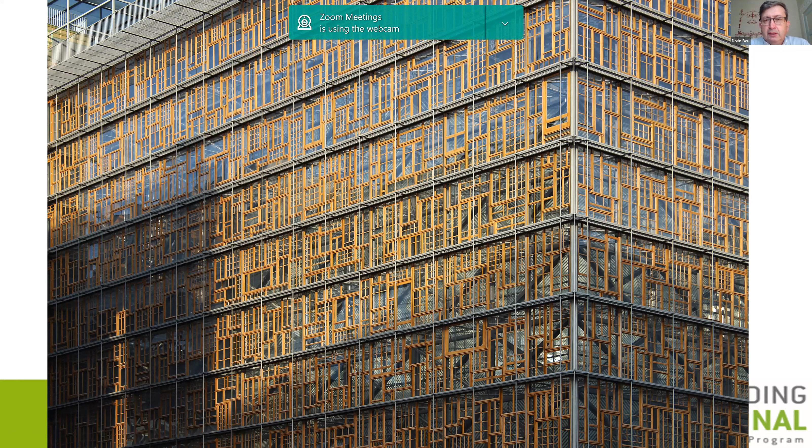So then, selection of a design team. Always try to find a design team with experience, local architects, local people, especially young teams who are interested in green or sustainability or other aspects like that. Because at the end you will need a very large professional team, and this team will tell you how well your future building will perform from the point of view of sustainability - will you have LEED Platinum, LEED Gold, BREEAM Excellent, or other systems for assessing a building?

Think about site design, ecological integrity, and avoid disturbance to water systems. That's very important. Also think about landscape, because in a school you'll need green spaces, but not a lawn. A lawn is not typical for this area—it's okay in England where it rains twice a day, but in our part of the world you need a lot of water to keep it green. So use local plants which survive well in your place, not exotic plants that won't last during winters.

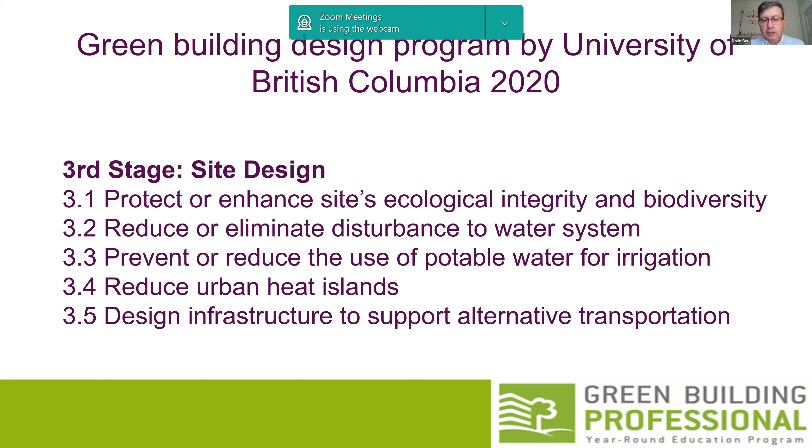Then think about alternative transport—bicycle, scooter, or for a green building, it's important to have public transport nearby. If you have a school, you need public transport so people can go by bus. That's one of the differences between a very energy efficient building and a green one. A green building also needs to think about transport, because it can be very energy efficient but in the middle of nowhere, so people spend a lot of time and fuel getting there.

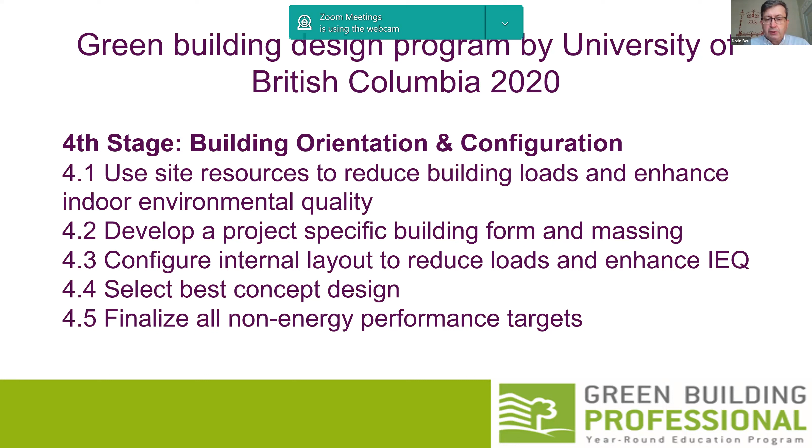Building orientation and configuration—at this point you start thinking about the architecture of the building, how it will enhance the use of solar passive design and things like that. That's very important, because you want to use as little energy as possible.

This is the typical stage for any building to think about energy, structure, envelope, lighting—it's appearing for the first time. Then the last part: reduce internal loads. Think about indoor air free of pollution. There's a tendency to use a lot of laminate furniture, but this comes with a problem—a lot of formaldehyde, which creates VOC problems. VOC is volatile organic compounds.

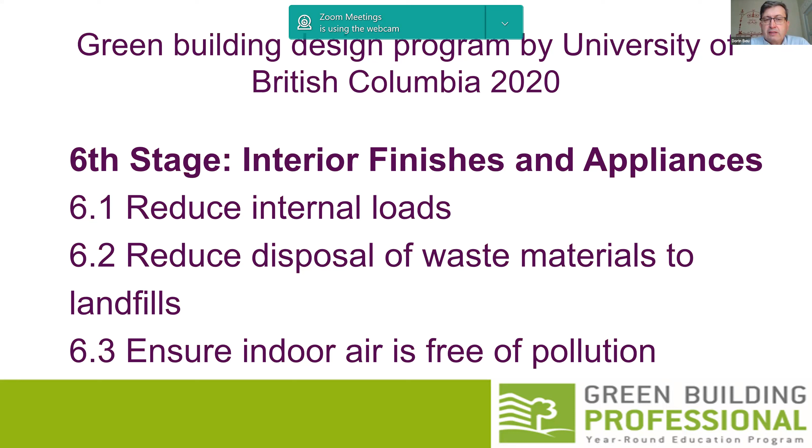Also think about all the waste materials that will be produced by any building. According to the EU, 19% of materials used for construction becomes waste. No one can afford so much waste, so think about it. As a conclusion: use less stuff.

Whenever you're thinking about a building, first ask: do you really need that building? Does it need to be so big? There's usually a tendency for any mayor to have big buildings, big offices for city council, big schools and so on, but does it need to be so big? So build less—that's one of the first steps—and then build clever, using clever solutions, and build efficiently.

Prefabricated solutions are usually an efficient way of building and also minimize waste. That's very important. And then, of course, specify low carbon. But first thing first, think about using less stuff.

That was just a beginning, because I used to be for 4 years the president of the Romania Green Building Council, after Steve Borncamp, an American who introduced RoGBC in Romania. That was an important step because it made us think differently, since the classical way of doing things, especially in the Romanian construction sector, was that only the price mattered—the rest had no importance.

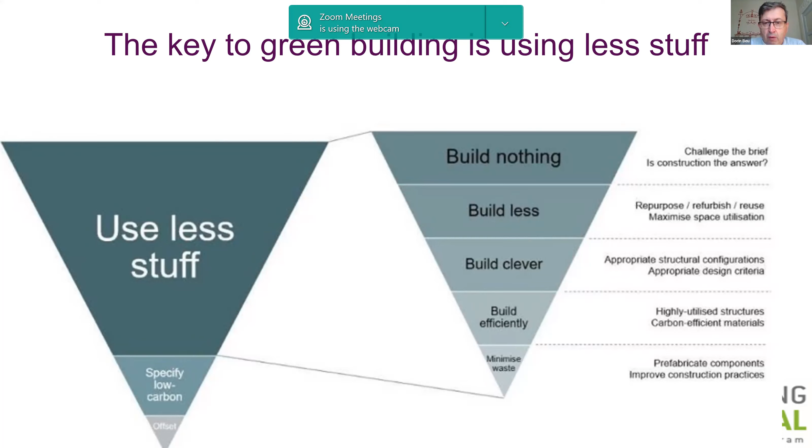But first I'll start with a plea for lighting. Why a plea for lighting? Because I want to start with the idea of why lighting is so important. Let's start with the advertising—everybody thinks that LED is the solution for everything in lighting.

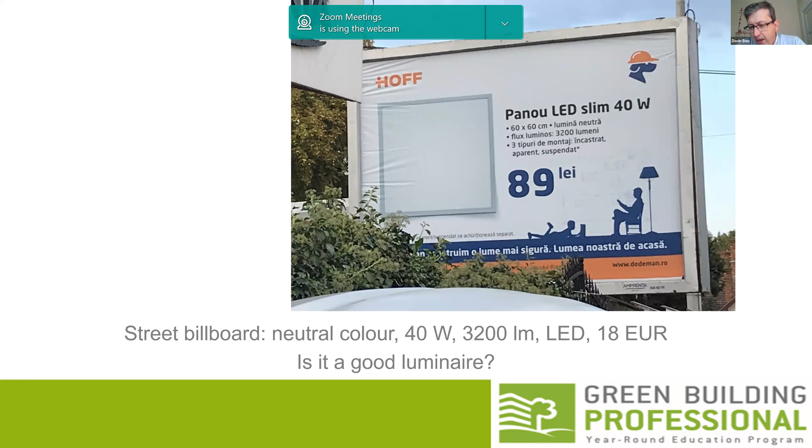So we got a lot of advertising saying it's a very good luminaire, very cheap. It costs the equivalent of 18 euros. It's not so expensive, but is it a good luminaire? Because every time someone comes with an LED solution, you need to think, okay, is it a good one? Because there are good LEDs and there are bad LEDs, and that's a problem.

First of all, lighting with LED has a problem in color rendering. Not everywhere is that a real problem. For instance, LEDs are not very good with red. If you have something red, LEDs are not the best solution. This is important for an art gallery or hospitals, but in a school I don't think it's so important. It's important when you're doing your makeup as a lady, but yeah.

Another issue is efficacy: from 1 watt of energy, how much light will you get? For instance, for this luminaire, you get 80 lumens per watt. But the newest generation of LEDs can have double the efficacy. So what will be your solution? Buying a cheap one which is not so efficient, or spending more money for the best efficiency, but probably it will also cost twice as much. It's usually a difficult question.

Also, no mention about power factor for electricians—that's an issue. What about life expectancy? Everybody thinks an LED has a very long life, something like 100,000 hours, but not all LEDs have this life expectancy. For instance, in a house you're using it for 1,000 hours, that means for 100 years that LED can function. Well, in fact, they don't last so long. Now we sometimes find that when you buy an LED lamp, it lasts only 1 or 2 years.

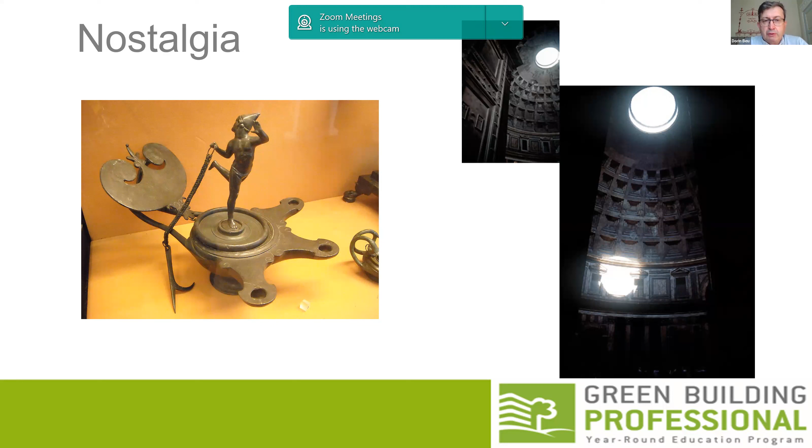As I used to work with a lot of architects, when I enter an architect's office, I'm always looking at the lighting, because lighting has got to do a lot with status—how much money you have, what's your taste. That was always the case, including during Roman times: if you were rich, you used a bronze candle, but for others there were oil lamps which were extremely cheap. That was the big advantage of the Roman Empire, which brought about the first democratization of artificial light.

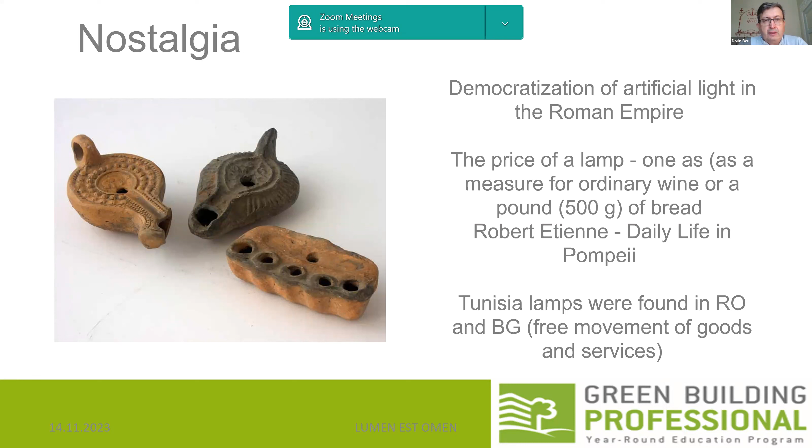This kind of lamp runs only on olive oil. So if you find this kind of lamp in the former Greek colonies in Ukraine, that means they also had olive oil coming from Greece, which was extremely important. Sometimes they were produced in other countries like Tunisia, and you can find them elsewhere as a sort of import material.

Also, there's always a nostalgia when it comes to the lamps used in a city. Sometimes cities use old shapes of luminaires because there's a lot of nostalgia.

There are some cities in Romania using the same type of luminaire that was used 100 years ago in the Austro-Hungarian Empire. It's a sort of nostalgia, using this kind of luminaires. But sometimes you go for extreme anticipation, and that's also the beauty of lighting, because sometimes you have a lot of design involved in luminaires.

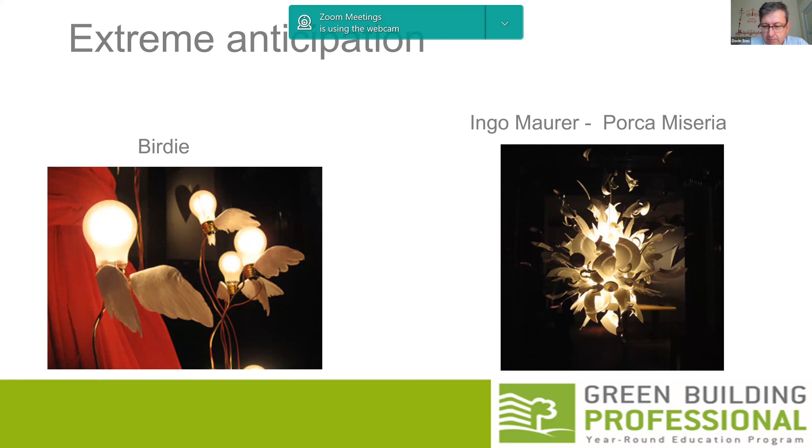Because you can have very nice luminaires, sometimes with very cheap materials, like this Ingo Maurer, which was using extremely, how to say, arte povera, which means art made from very cheap materials, like from broken glasses or plates. He made an extraordinary chandelier.

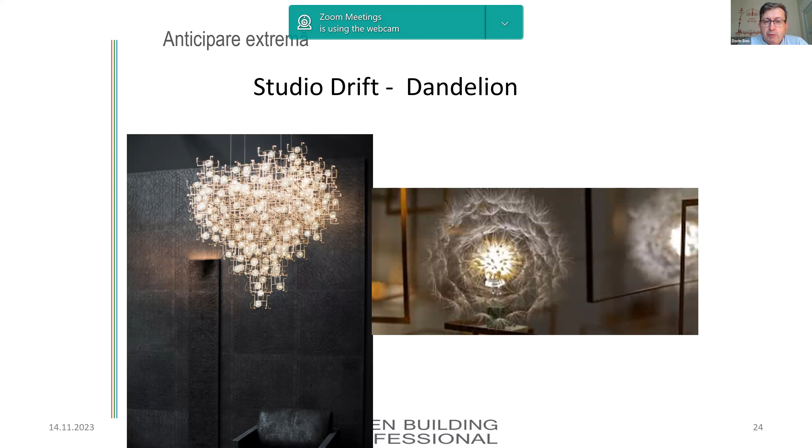But sometimes it can be also innovative, because they are using new solutions which were not possible with former solutions. For instance, this is a chandelier made with LEDs, and on these LEDs they have glued dandelion seeds. That was not possible before because the temperature of an incandescent lamp is 300 degrees. If you're gluing something, it's setting fire instantly - well, not instantly, after 1 minute it will be set on fire. Now you can do this with LEDs.

Or sometimes architectural lighting is a little bit too much. For instance, in the 2000s, it was something normal to have color lights. Now I'm more skeptical about color lights, which was a technical prowess 20 years ago, but not anymore. You can have color light, but you have to keep in mind what's the purpose of this, because sometimes people are using it inside their home, and there's a lot of advertising - you can have color changing lamps.

But what for? Because natural light is white light. You don't have blue light or red light - rare, except when you have aurora borealis. But this is okay for 1 minute, not for the whole night. I tell you, you won't like to have it in your living room and see your kids with green faces. That's not something very pleasant.

Sometimes architectural lighting doesn't need to be expensive, because one of my problems is that sometimes green buildings are supported by a lot of companies trying to sell very expensive state-of-the-art products, and it doesn't have to be expensive. Sometimes you need to be innovative or creative.

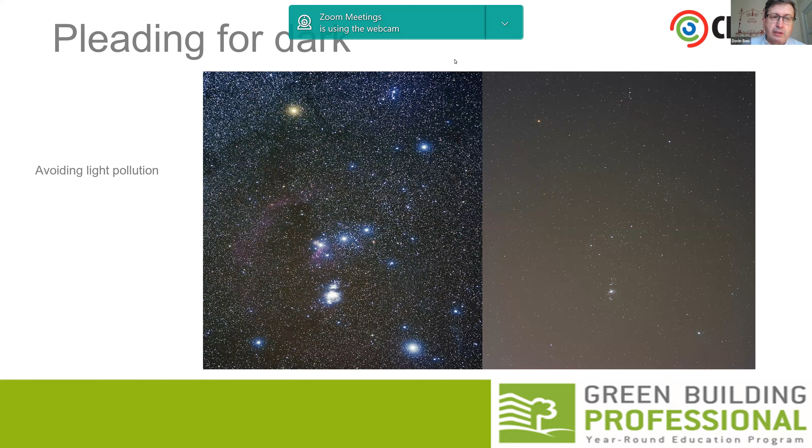That's why now we are talking about avoiding light pollution and the importance of seeing the sky, because sometimes we see this light pollution even from satellite.

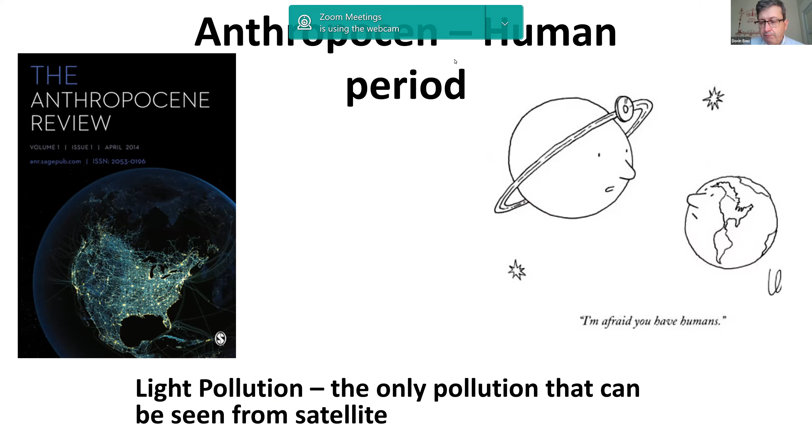But that's the basic idea of green lighting, because we have suffered a historical change - 100 years ago human rhythm was based on natural light, so most people were working in rural areas, working a lot on the land, and whenever it got dark, they came home.

And they were going to sleep. So a lot of work outside, sometimes even siesta, which is now found to be very healthy. And all the energy and materials they used for housing were renewable.

What we are talking about now already existed 100 or 150 years ago, depending on West or East Europe. But now we have this theory about the city that never sleeps and the 24-hour rhythm. For people from that era, it wasn't conceivable to stay in a room doing nothing - like just staying in front of a screen, listening to someone talking - that was inconceivable 100 years ago.

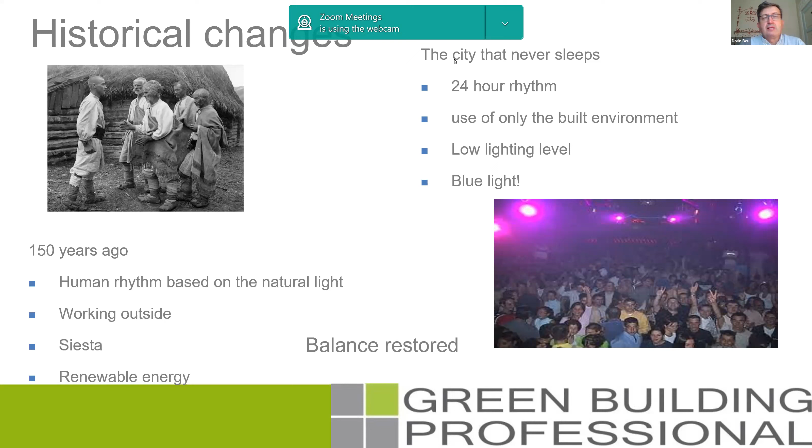So the problem is we need to restore the balance. It's the essence of green building - to restore this balance that has changed or shifted in the last 100 years.

And then in 2000, we found that blue light affects us strongly because we are very sensitive to it - it stops the secretion of melatonin. And what is melatonin? It's a hormone that we normally secrete during the night.

So in the evening, you go home, it's already dark outside, and you put yourself in a chair to watch TV, and then you feel sleepy. Why do you feel sleepy? Because you start secreting this melatonin, a hormone which gives you this feeling of sleep, and that's why you sleep during night.

Because think about a simple idea: why are you sleeping during night?

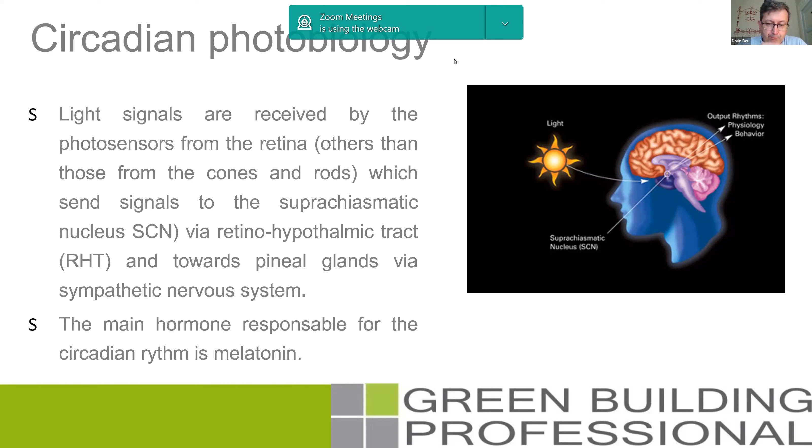So that gives a problem now, because now we have circadian photobiology, which is the way our body has an internal clock, and that internal clock tells the body it's morning, it's night, connected to the natural light.

So you can't avoid staying outside, or not being connected to daylight. This is one of the problems of speleologists, people who go into caves. You cannot stay in a cave more than 3 days. Why? Because your circadian rhythm is stressed, and after 3 days you have problems. You don't know if it's morning or night. Your whole body is messed up, and you start feeling unwell, with psychological issues too. So lately they do not allow more than 3 days in a cave, because it creates a lot of problems.

That's what I'm thinking about people who work in bunkers, army bunkers - from time to time they need to reset their clock, because it's so important to have this reconnection with nature.

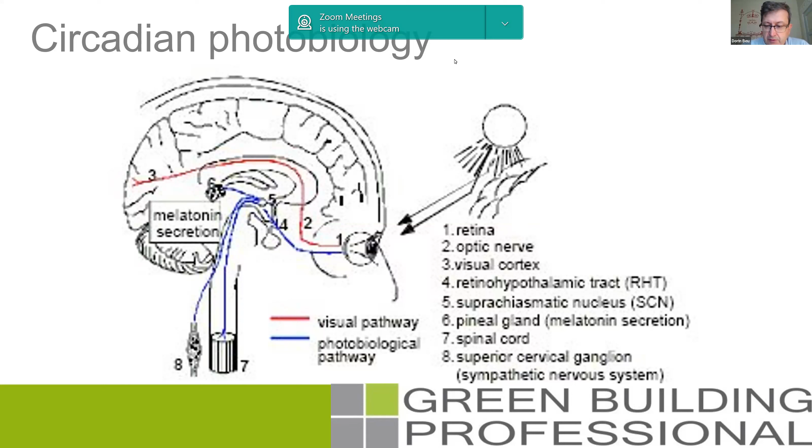So this is the circadian rhythm - try to use as much time as you can outside, because we are used to working a lot inside buildings, and this is not natural for humans.

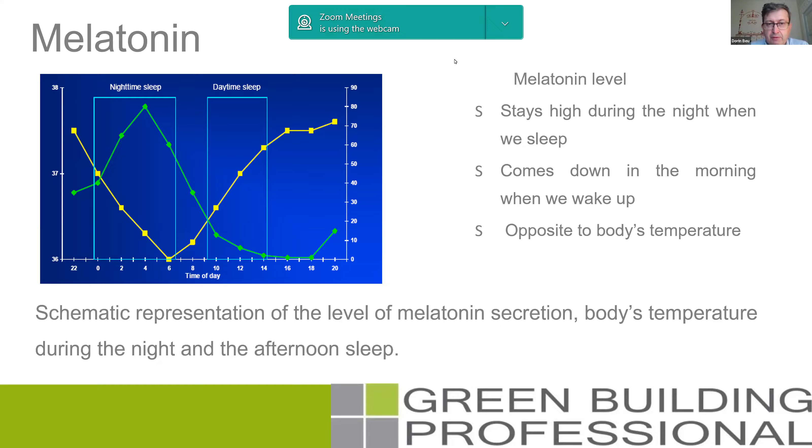So it doesn't mean you need to light it up for the whole day, it's simply that you need to do something with that building. Sometimes with architectural lighting, it's like makeup - you don't need to use a lot, just use it where it's really necessary.

This is also important - there's a lot of importance about green lighting and green buildings. On the sustainable side, it's important to show that you're not creating light pollution, so the light from your building doesn't go to your neighbor. This is extremely important - avoid light pollution, especially to your neighbors. You don't need to put a lot of light, especially light pointing upwards - a lot of recessed luminaires give light upwards, and that's a waste of light.

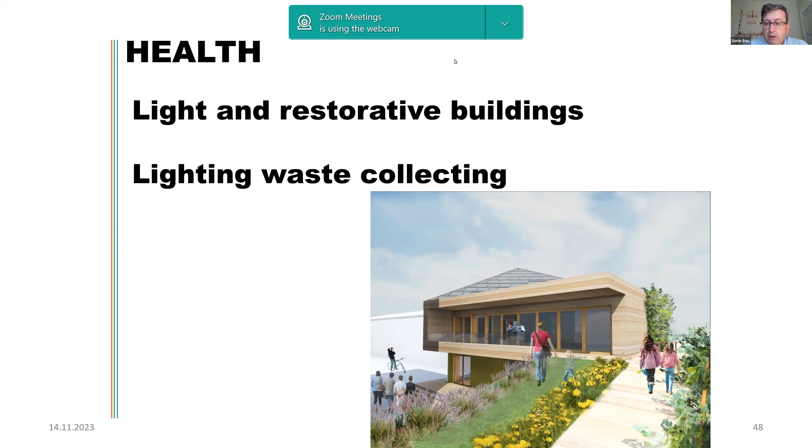Also, you can sometimes have plants inside the building, but it's not the best solution, it's one of the possible solutions. It changed everything with the LEDs. Why? Plants don't need white light, they need a combination of blue light and red light. So that's also a problem now for police, because now you can grow cannabis and these kinds of plants too easily with the energy efficient solution. I'm not pleading for this solution, sorry, but sometimes new discoveries create new problems, including for police. For small plants that's okay, you can grow it inside, but for the moment it costs too much money, and I will not encourage using this solution.

Also think that there are people who are not very happy with artificial light at night. We had a conference in Romania, and again, it's a question of balance: how much light are you going to use inside the city, where it's important and where it's not. Architectural lighting is important in some cases, if you have tourists, also during the evening, but not after 10 or 12 o'clock, because it creates only light pollution.

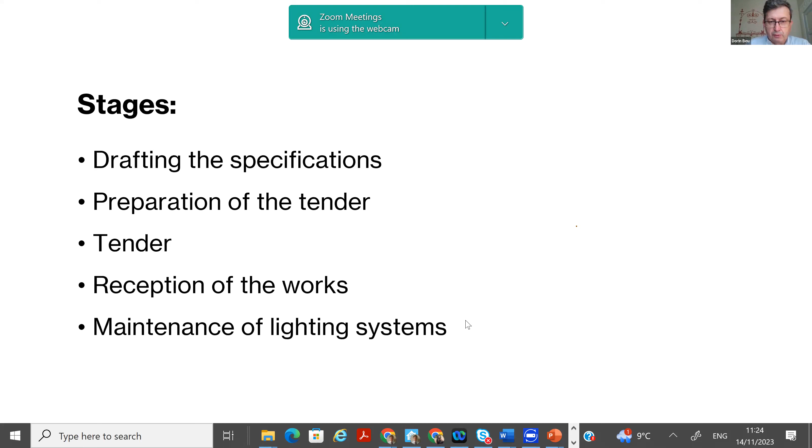Next, talking about safety criteria, we have emergency lighting for marking exits. Before it was written 'exit' in your language, which is not accepted now - the European Union says we don't have to argue about the language. There are many countries with two official languages, and there's always a discussion about which one to use. Now they say it's a simple pictogram of someone running, showing where to go, left or right, and this is very important.

There are several systems. One system uses a local battery. The problem is that in some cases they are cheap batteries, and after 2-3 years they don't work properly or don't last for 1 hour. For instance, in schools in Romania they should last for 3 hours, which is a lot of time - I don't know why 3 hours. I can understand in a hospital they need 3 hours, because there you have unconscious people and it takes a lot of time to evacuate everyone from the building. But for a school, 3 hours seems like a lot.

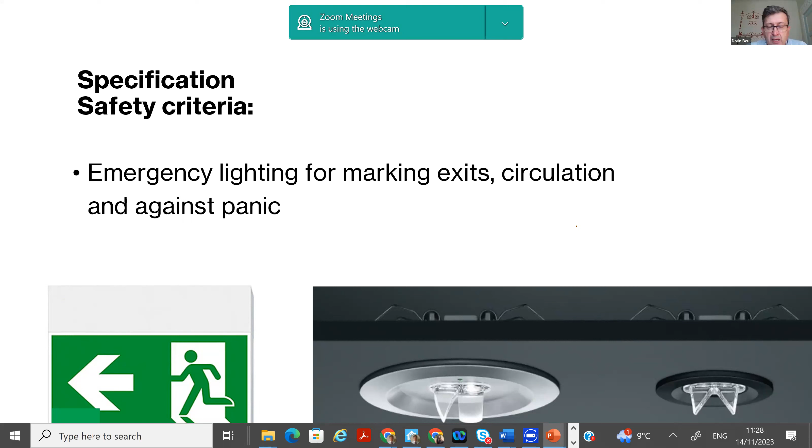So that's the first criteria, safety. Then there's a comfort criteria. You will ask me, where should I find these comfort criteria? It's in these standards, 12464. From this European standard, you can find the level required in a classroom: 500 lux.

It's required, modified - this is something new, appeared last year, this new standard saying that in the case of a classroom, you can ask for a higher level of illuminance. For what reason? A lot of students or people have glasses, and if you have glasses, you need more light, because a lot of light is absorbed by the lenses. Or in the case of old people like me, I need more light because I'm more than 50 and I need glasses.

Also important, I need uniformity of lighting. I don't want spots of light, this area more light, this area less light. If possible, I need uniform lighting, everywhere around 500 lux. But of course, you cannot keep 500 perfect everywhere. Some places you have 600 lux, some places even 300 lux with a 0.6 ratio. It's okay, but on average you need 500 lux. That doesn't mean you put the lux meter at every point and it reads 500, 500, 500 - on average it should be around 500 lux.

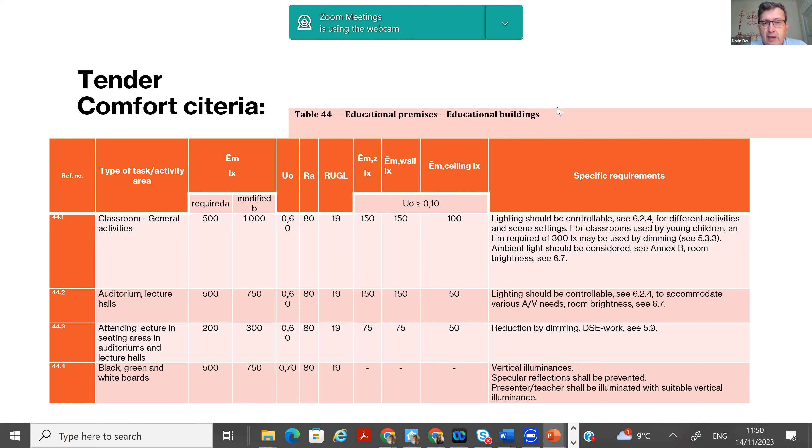Because of all these criteria I presented here, 500 lux, uniformity 0.6, I need to go more than the required value. Only with the glare do I need to be under 19. Let's go again. For floor, ceiling, and walls, it's not quite as it's asked, but usually I'm only asking for illuminance on my working plane, for uniformity, and for UGR, meaning glare, unified glare rating should be less than 19.

The problem is here I need 4 times less in order to ensure the illuminance is above 500 lux. So yes, you should ask the company doing the design to show that the target values are reached. You had some specification, they've done the calculation, and they can show that all your requirements are met, and that the power is only 226 watts, which means you need less than 4 times the value from before.

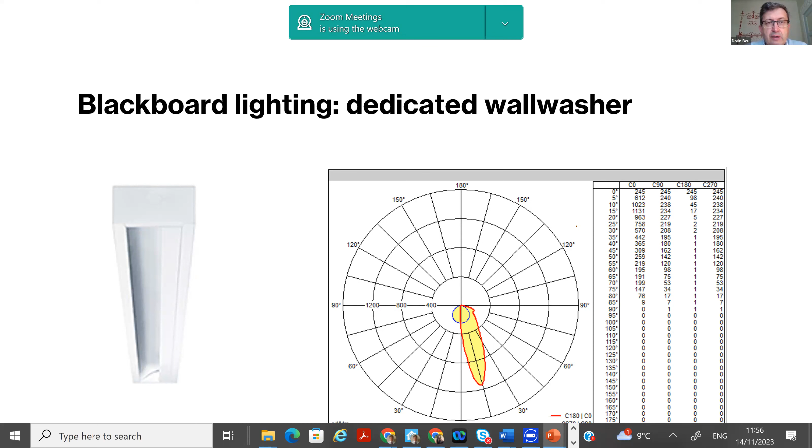That means it gives light only in one direction. The direction, of course, is the direction of the blackboard. Now it's blackboard, whiteboard, it can be green board, doesn't matter. You need light on that wall where the blackboard is. And usually you cannot have light there if you're not having a wall washer.

And then what I also recommend is to have an electricity meter exclusively on the interior lighting system, so you're measuring how many kilowatt hours were used by the interior lighting system. Why interior lighting? I'm not measuring how much energy is used for exterior lighting, that's another topic. But I need to measure what's used by the lighting system. So how do I measure? By kilowatt hour. Then I do a simple calculation, get out your smartphone, divide it by how many square meters you have in your school. That's how I can compare two schools.

Because if I'm comparing as an energy, but one school has double the surface of the other, it's comparing apples with pears, so it's not fair.

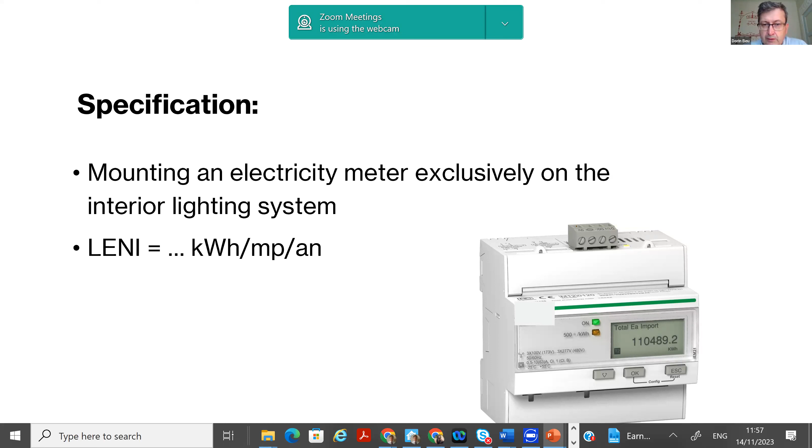Remember, this is important for measuring the performance of a building from the point of view of lighting. The same criteria apply to heating, ventilation, hot water. You need to measure how much energy you're using per square meter for one year's time.

And also for accepting lighting works. So you had the tender, somebody won the tender, they installed some luminaires, they will tell you they found very good and very cheap luminaires and whatever criteria they will have. But in order to accept this lighting work, you need to go with a lux meter. You don't need to go personally - if you're working for a city council, you may have a specialist, independent from the company who did the job, and he will go and measure the average illuminance on that space.

But it's important to measure it because, one question should be: if I need 500 lux and the installation is brand new, and I measure all over in 12 points, and the average illuminance is 550 lux, is it okay or not?

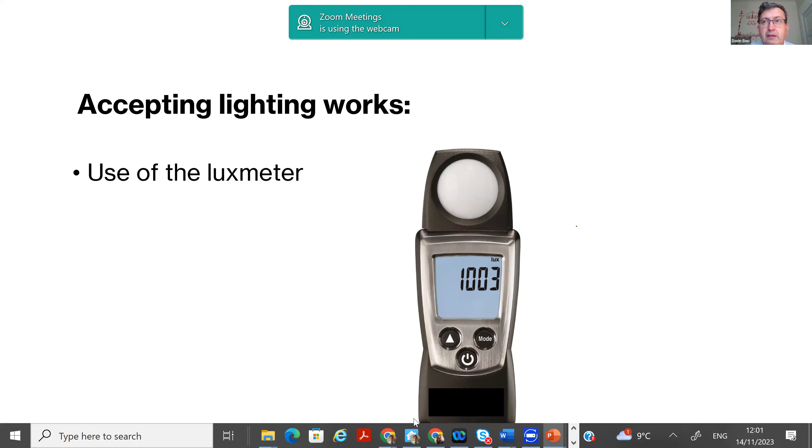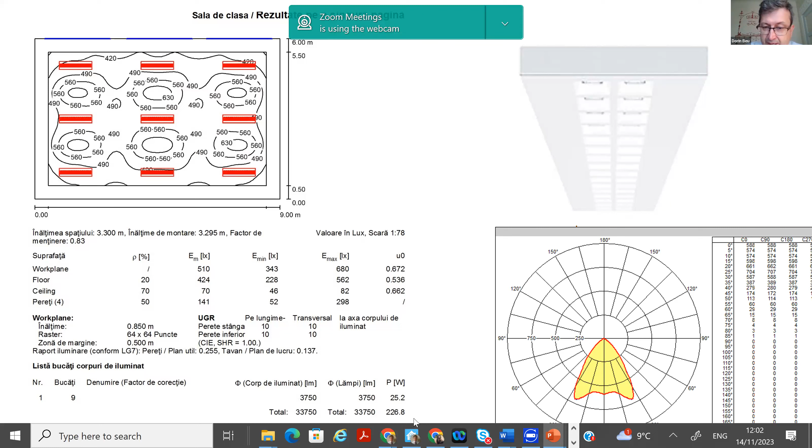0.80 means you're cleaning the luminaires every year. I don't know about Ukraine, but in Romania, definitely they are not cleaning the luminaire every year. So I cannot see people coming and dusting the luminaire every year, unfortunately. They should do that.

Also an important thing, sometimes really forgotten in many places, especially in East Europe, is maintenance of the lighting system. What does that maintenance mean? It's the replacement of faulty luminaires. So I have luminaires, but sometimes, even if they are LED luminaires, it doesn't mean they work properly. Sometimes it's a faulty one you need to replace - it happens. It can be LED, this doesn't mean it's fault proof.

Second thing is improving the control system. When they are installing the control system, they are making some assumptions about how the space is used, and they give you some scenarios. For instance, I'm writing something on the blackboard - this is a scenario where I need lighting on the blackboard. Another scenario could be I have a presentation with a video projector. In that case, I don't need light on the screen - definitely, I need it as dark as possible.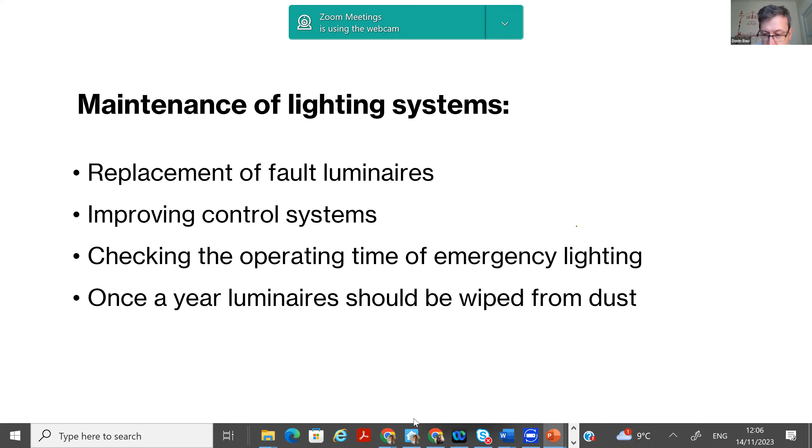And that's always the question: should we use a control system? Well, LED luminaires need a driver—the LED doesn't work directly connected to 230 volts, it's connected through a driver. It's an electronic device which supplies constant voltage or constant current to the LEDs. So these drivers, if they use DALI or DALI with the DALI 2 protocol—DALI doesn't mean the painter, it means a universal protocol—so in order to be sure that luminaires from different producers work well with my control system, I ask them to have DALI control.

And most of the luminaires, 99%, are DALI control, so they're using the same protocol. The only problem is that DALI on a driver just means it's a DALI driver, but DALI 2 is verified by an independent association—that's the difference. So I need that in order to control the luminous flux of the system—it has the possibility to control the luminous flux, or sometimes even the color temperature.

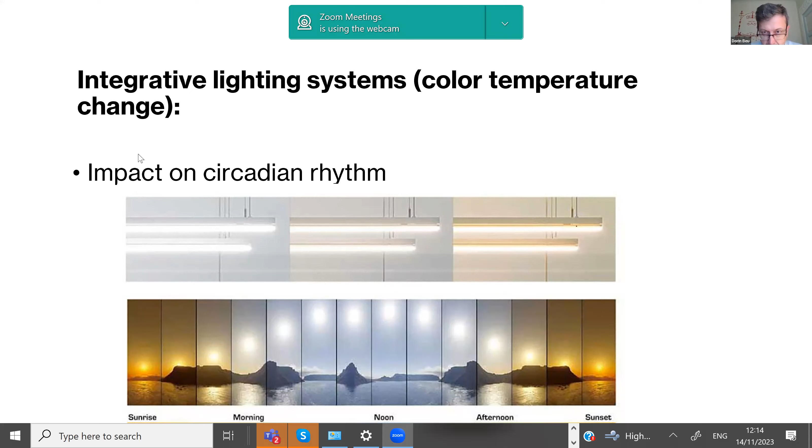There's one more presentation, about the future of lighting. My last presentation will be about the lighting future.

First of all, with all new technology there's the so-called Gartner slope. Whenever a new technology emerges, there's a peak of inflated expectation. That happened with LEDs more than ten years ago—everybody expected a sort of miracle from LED, that it would solve all the problems.

In fact, we then realized we created another issue: light pollution. LEDs have a peak in the blue area of light—most so-called white LEDs are actually blue LEDs which then have rare earths giving light across the whole spectrum, but they're still producing a lot of blue light, which enhances light pollution. That's always the case with technology: you solve one problem and create another.

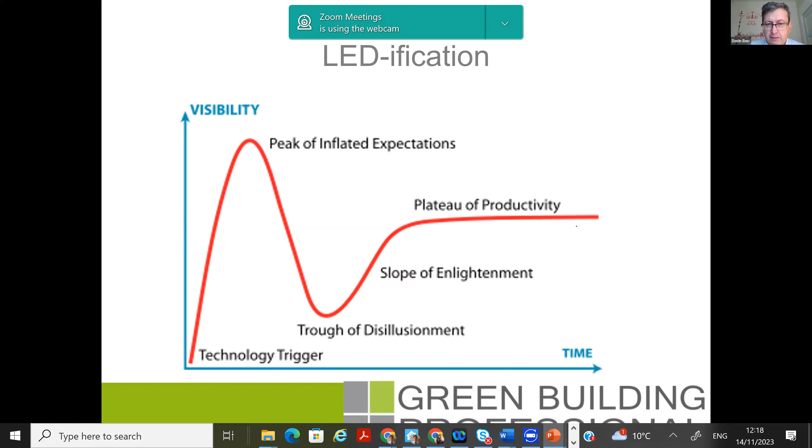Sometimes you must avoid buying the first product, but if everyone avoids buying the first products, the technology will be doomed. So let others buy the new technology, and always look for a product when it's on that plateau of productivity. It was the same with flat TV screens - at the beginning they were extremely expensive, now it's getting lower and lower with better quality and more gadgets. It's the same with LED.

Repeating a lot, there are several European norms. Work with these European norms. The first norm is about interior lighting. 1838 is about emergency lighting. 15193 is for performance. LED has no influence on the norms - it doesn't matter if you're using LEDs or not.

For the moment, we have no norm on human health. The problem about blue light - how much blue light should be inside the room, especially in the afternoon - we are still discussing this issue and haven't agreed. We agree, we disagree, but the second problem is about melatonin, and you know the problem now is with

children and youngsters and teenagers. Why? They are looking at computers and smartphones a lot during the night, and now they have a lot of issues with sleeping. I can hear it - my daughter is 24, but all the time complaining she's not having good sleep. All her friends have more or less the same problem, but it comes from the fact that they go to bed with their computer, their smartphone, and so on.

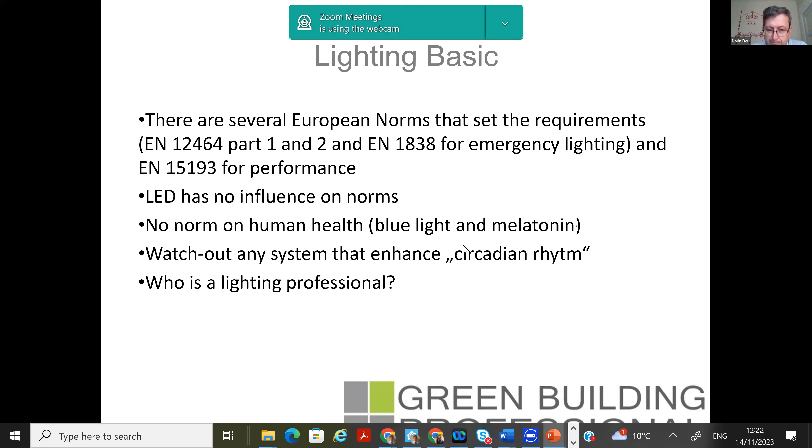Okay, so luminaire efficiency now is over 130 lumen per watt, and it's changing every year. I can put 150, I can put 180 - there are already LED lamps at 210 lumen per watt, coming from Philips. Last year they launched a new range of simple lamps which are extremely successful, at 210. It's more expensive as usual, but for the moment there's no limit in installed power.

So that's why you now have stadiums with LED lamps - 10 years ago it was not possible. And the big advantage with LED lamps in a stadium is that you can dim them, they can sync with music, and you can do a lot of things that were not possible with a metal halide or sodium lamp. So we now have total control of luminous flux - we can dim from 0 to 100%, we can play with light.

We start playing with color temperature, having warmer or colder temperatures - yes, we can have that now, but we're still working on the photometry, meaning changing the distribution of light on the same luminaire. So you could have a spotlight, then suddenly push a button and it changes to a very wide distribution. For the moment, it's not possible - it's quite complicated, but it will come in the years. They are working on it, it's still not

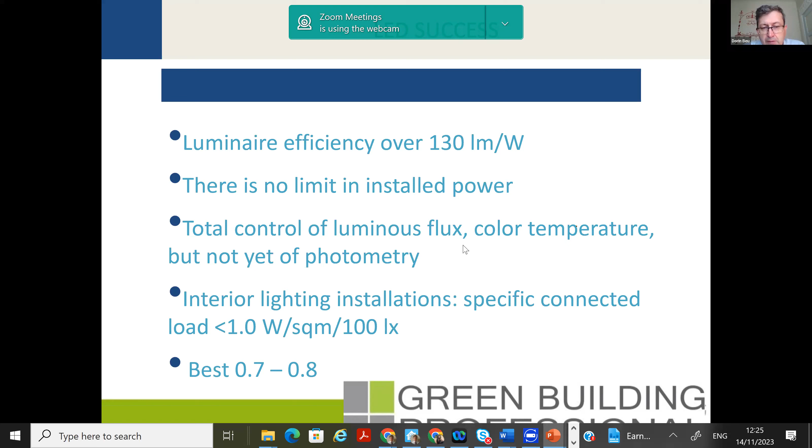Strangely, if you have a big room, you get better results because you have no reflection. One of the problems with small rooms is you have a lot of interreflection, and every reflection is a loss of energy. So in a bigger room, you get bigger results. Smaller rooms - so don't ask for good results in a toilet or a small office, because in small rooms you cannot get good results.

Regarding the control system, the most important thing is to clarify what your need is, what you want for a control system. It's easy to say I want a control system, but what do you want to control? Okay, you want to control the luminous flux, you want to have some scenarios. Excellent, that's a very good use.

But then you need to specify, do you really want also to change the color temperature? In some cases it can be interesting, but in some cases it's a waste of money. Sometimes people want to control the color of the lighting. Okay, why control the color? Do you need a classroom with red lights? I don't know, maybe for some kids, for enhancing their attention, it can be a solution, but sometimes it's more than you need.

Also, what kind of sensors will you need? I told you the best solution are video systems, but nobody is happy with a video system in an office, in a toilet. No, that's clear. So it's a discussion about the privacy needs of people, because sometimes this video camera, you cannot set perfectly to show only the street or only the room. It can be an issue.

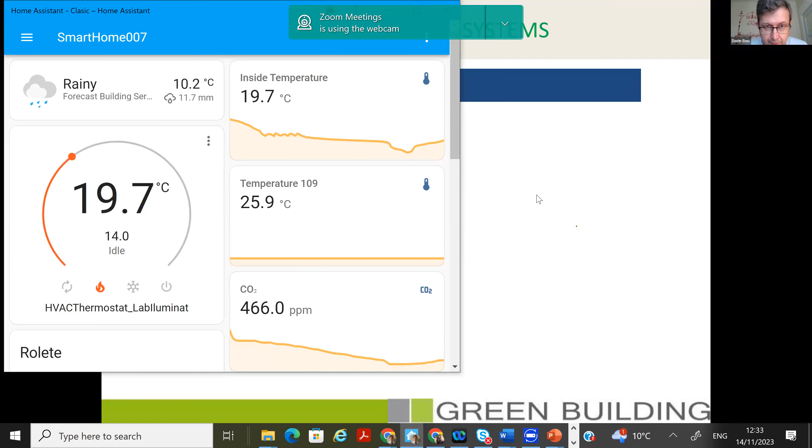Well, just to see that there are some, now I have to get rid of this system.

The question we are having now: are the luminaires we're installing now future-proof? Because what's happened till now? We had fluorescent luminaires, high-pressure sodium and metal halide luminaires. When LEDs came, all these old luminaires were simply dismantled. Eventually, some materials were taken and recycled, and the rest went to the landfill.

But now with LEDs and this continuous evolution, I have LEDs with some performance. In 5 years' time, I'm sure we'll have better performance. But what should I do? Should I simply throw out the old LEDs, still functioning, and replace them with better ones? Or could I simply replace the existing LED boards with new, more performant ones? But nobody allows you to do this.

This is one of the issues we are having now, including with public lighting. Officially, you can take it down and replace the existing LEDs with new ones. But I've never seen it done. I've been asking the City Council, have you done a refurbishment with a new solution? And they said no, they just say buy new ones because it's the cheapest solution, and this is again a waste, because it's not circular economy.

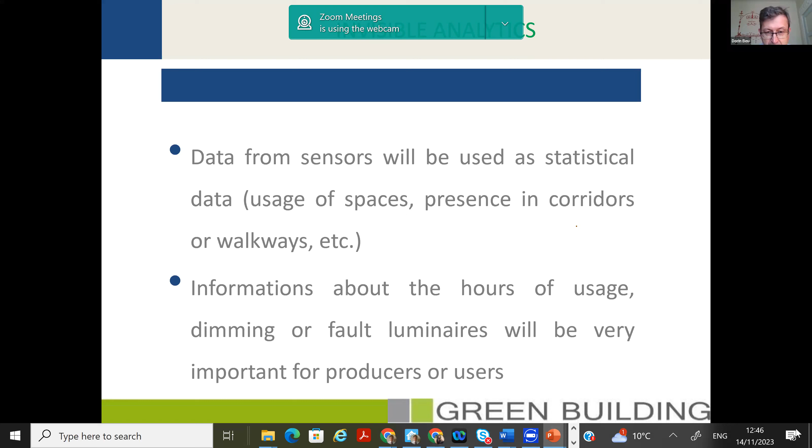That's the bad part of invisible analytics.

Clients and architects will want more realistic simulation, including movies. They say, okay, that's a nice solution, but I want to see how it will look in my piazza or in my room. That's why lately we have more and more complex teams of architects, designers, lighting specialists. For instance, Dialux can be connected with BIM systems like Revit, and it can use IFC format for data and drawings, which is a change.

A note about wearables. It's more one of the problems, especially for public spaces. It connects with the discussion from before, with something Dan mentioned.

Should I put light when people are there? Well, one solution is wearing Bluetooth-enabled jackets or wristbands to detect bicyclists, because bicycles, from the point of view of a driver, are a nightmare - you cannot notice them and you have an accident. It can be a solution, but then the solution becomes a problem too, because there's a lot of equipment that needs to be used in order to see it.

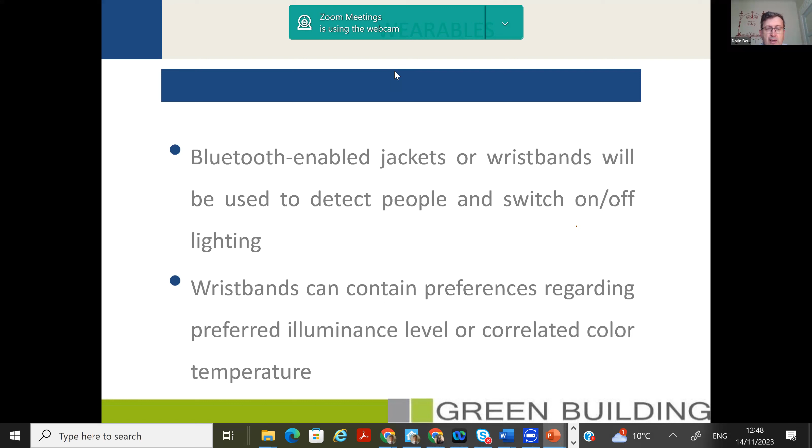Another issue is that people have preferences. What do I mean by preferences? I would like not 500 lux, I would need 1,000 lux. I would need a warm color, not a cold color. And from my wristband, the lighting system can interact with me. This is the so-called scenario for the future, but that can lead to a lot of innovative solutions. Let's see how it will go.

So now about smart homes: I can control, I can dim, I can change the color temperature, light direction. How can I control light direction? I can control some luminaires which go in one direction. That can be a solution.

It can go automatically with daylight. If there's enough daylight, I have daylight sensors that can dim the light, but only if I'm present in that room. If I'm not there, the only problem is how the system can know if I'm there.

There's also some kind of active daylight system that uses mirrors. Probably when you were kids, you were playing with mirrors, sending messages from one block to another - the same idea is used now with mirrors, the so-called mirror tracking system, just to get light probably on the north side of a building.

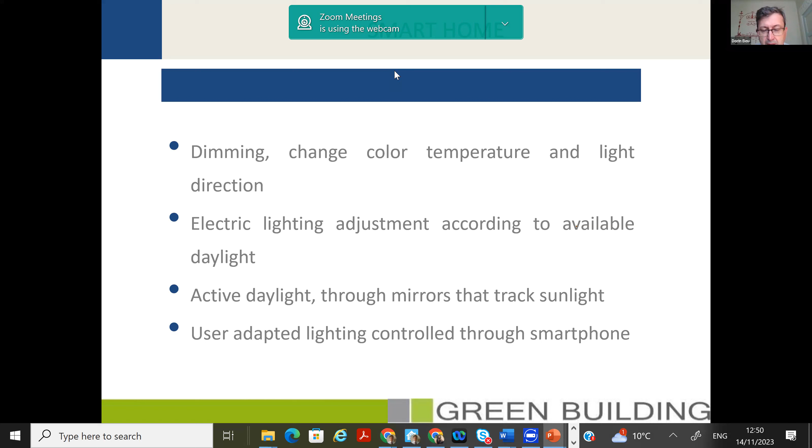I can also control through my smartphone. No problem - I told you I have two systems on my telephone, but why control the light in my laboratory from here? It's a big question. Also, I would not recommend using color changing toward red or blue, because you never like the blue light or red light inside a home, only for a while.

And we have drones - you in Ukraine have become a specialist in drones - and there are already some systems for luminaire mounting, especially on high poles. They are used in Norway, in some areas where it's freezing cold, but then there's a problem with drones, though that's another story.

Drones are used for repairing or projector orientation, especially in stadiums. In some cases, instead of using pole lighting, you can have drones with lighting. That's an image from a project in China, where instead of having public lighting, connected with what Dan said, you will rent a drone with lighting. So instead of having a pole light, you have a drone light. It's a possible solution, and in years to come it may be one of the possible solutions - you go to a park, you're just renting lighting, and the lights go with you.

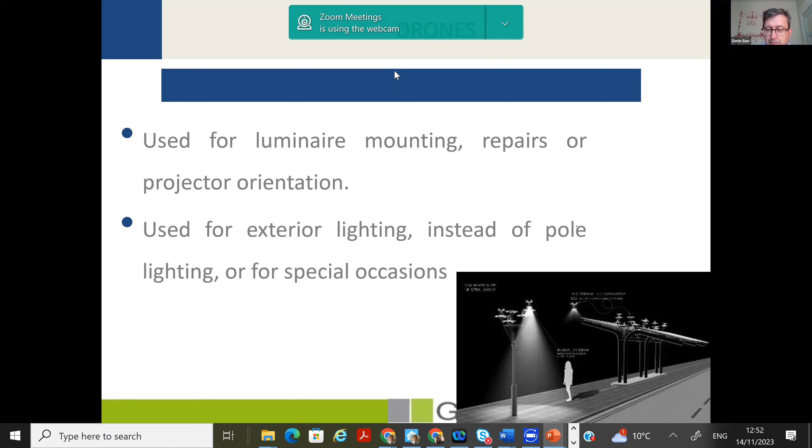The problem is still with the control system, but probably in the years to come, they will learn your individual behavior and your preferences. Let's hope there will be a moment where they can give you a diagnosis of the control system. I'm waiting for the moment when I will just talk to the control system and say, I would like the lights on the blackboard switched on, and they will be switched on, sort of like Alexa. But for the moment, it doesn't go so easily as expected.

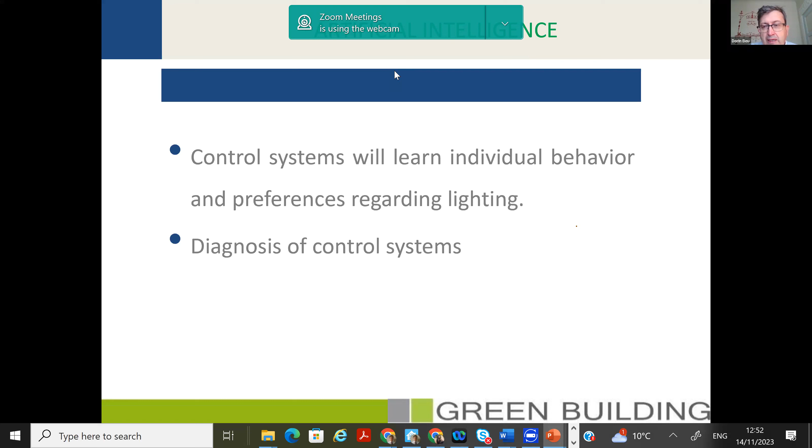Flyers, brochures, and catalogs. Well, I'm from the times when people were coming with catalogs, huge catalogs. You needed to be very strong in the lighting industry to bring 10 catalogs per producer. Not anymore, because everything is now online.

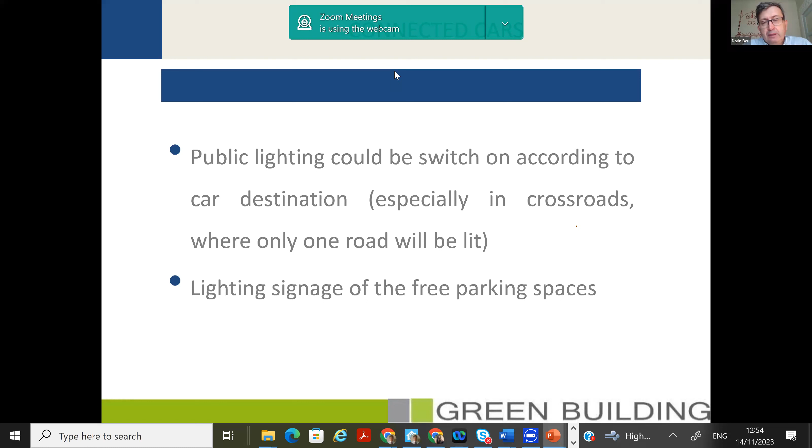Public lighting could be switched on according to car destination. That can be a solution. Lighting signage of the free parking spaces - that can also be a possible solution for lighting in the years to come.

What is also interesting nowadays is that we can print luminaires. Already Philips can do it on demand. It's very strange, because for the moment, Philips, now called Signify, was a big producer, but for large quantities. Now they say, okay, you want only 10 products, you want them in the colors of Ukraine - okay, no problem, we will print them with 3D printing. And that has changed a lot.

We found that many products from the lighting industry are big products, and usually you bring a lot of air with them. Now, if you're just printing the diffuser on site, you will save a lot of energy because a lot of space was taken up by these huge products. What you can print is usually plastic. The LED luminaire, the cable - this cannot be printed. But you just have the lamp which produces light, and the wiring, and then you simply install it into a luminaire like this.